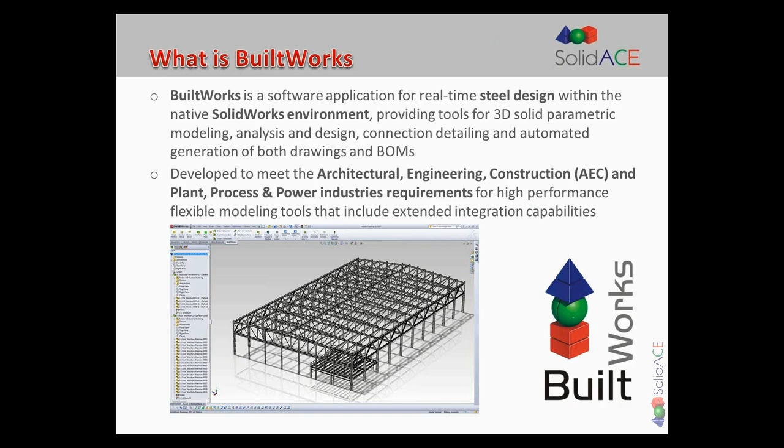BuiltWorks is an interface for structural design for SolidWorks, and it is the interoperability functionality for SolidWorks to bring SolidWorks into architectural plant building design workflow. We expand the native capabilities of SolidWorks, not replacing the power proven 3D modeling engine of SolidWorks. We're just moving it to next level by extending the list of existing tools.

Why we add additional structural modeling objects into SolidWorks? Here is a comparison of SolidWorks structural member, or as it's called, weldment, and a new object that we bring with BuiltWorks. It's BW beam object, or BuiltWorks member. You can see the main conceptual difference. The BuiltWorks member is a single feature, single new feature in SolidWorks feature tree, comparing to structural member, which is combined from several features.

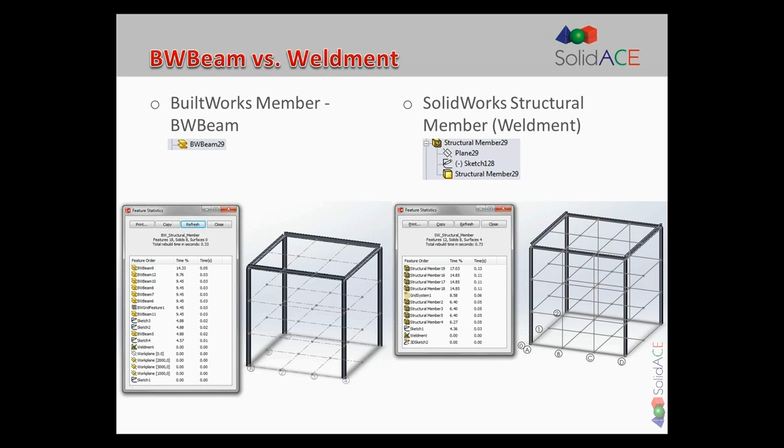I can say at least 4 features are needed to be created in the tree to create a SolidWorks structural member. And this, of course, impacts the performance, the capabilities of SolidWorks. Moreover, as you all know, with weldments you can only work in part mode, then manually assembling them into assembly, while with BuiltWorks you can start working in assembly mode, or you can work in parts or in combined way. So it's more flexibility and more power, more performance in SolidWorks.

Now the second aspect of BuiltWorks is the range of interoperability features. It is the support of the most popular data exchange formats in this specific industry area, CIS/2 and SDNF, Steel Detailing Neutral File, and CIS/2 stands for CIMSteel Integration Standards Release 2, which are the main structural steel data exchange standards. With support of those standards, we provide the SolidWorks link to plant design, enabling to exchange data with such plant design systems like AVEVA, SmartPlant 3D or PDS, AutoPlant, and other plant design systems.

We also do provide the bidirectional link, direct link to STAAD.Pro, the most popular structural analysis and design system. So we enable SolidWorks users to do code-checking-based structural analysis for the models in SolidWorks. But with CIS/2 format analysis model, which is supported in BuiltWorks, we can also link SolidWorks models to other structural analysis systems like SAP 2000 or RISA or Robot, and a range of others who support CIS/2.

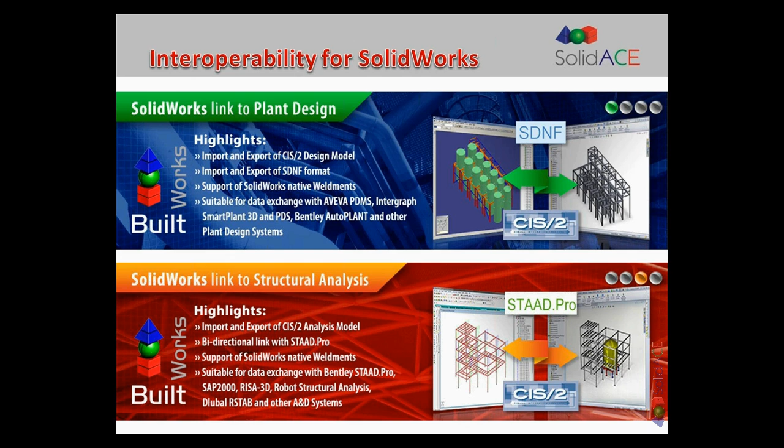Same formats also provide link to detailing and fabrication systems like Tekla or StruCAD or others. Well, Tekla and StruCAD today are in one team, but then there is SDS/2 high-end fabrication system, and also a wide range of other building and structural design systems like Autodesk Revit, Bentley Structural, ProSteel, Graitec Advance Steel, AutoCAD Structural Detailing, and so forth and so forth.

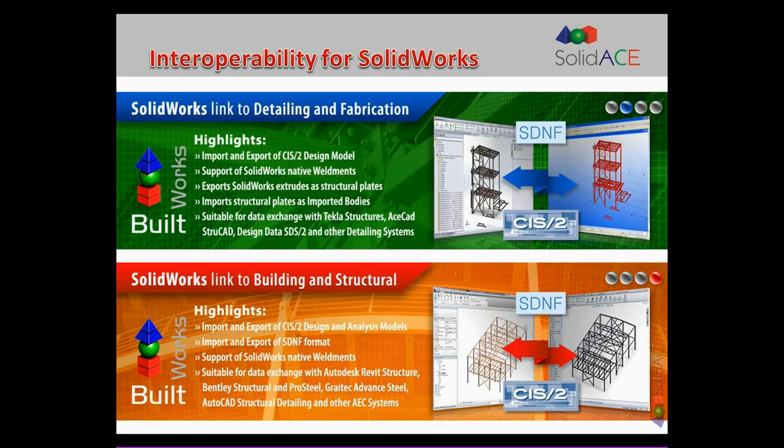So the main concept and philosophy of BuiltWorks is to enable SolidWorks users to prepare general arrangement models of building and plant structures using typical AEC structural design rules and features of steel materials, which we bring with a range of steel section profile databases that are provided with BuiltWorks.

Also to enable SolidWorks users to effectively exchange the intelligent structural steel design data with third-party AEC and plant design and detailing systems by putting SolidWorks inside the whole plant or building design workflow. And of course, enabling structural analysis and design of created structures using either SolidWorks Simulation or leading market analysis and design software applications.

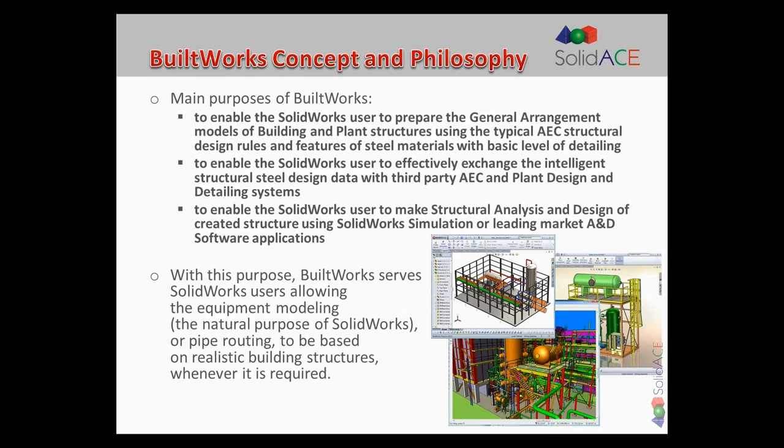So with this purpose, BuiltWorks serves you as SolidWorks users, allowing the equipment modeling, for instance, the natural purpose of SolidWorks or pipe routing or other SolidWorks functions, to be based on realistic building structures whenever it's required.

Just to emphasize the importance of those interoperability standards, here's a typical mix of solutions in engineering, procurement and construction companies. I don't say that each company has this variety of plant design systems, structural design systems and analysis systems, but if you look from company to company, there is a mix of various solutions, and typically there are several departments in such companies: the mechanical department, structural department, plant department, and so on.

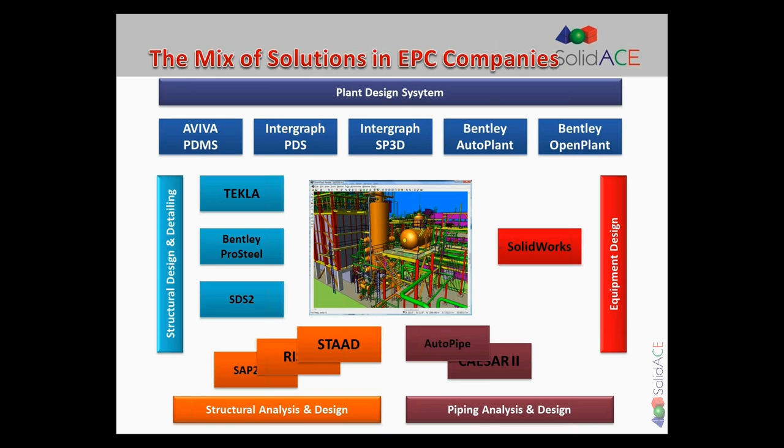So for equipment design like SolidWorks, of course, there are also some other vendors, but we don't talk about them today. What we wanted is to stress the interoperability requirements to enable all those applications to work together. So if we take a closer look at what data exchange standards those applications support, we always and everywhere need either SDNF, the older format for steel data exchange, or the current trend format CIS/2. For piping analysis, there are other formats.

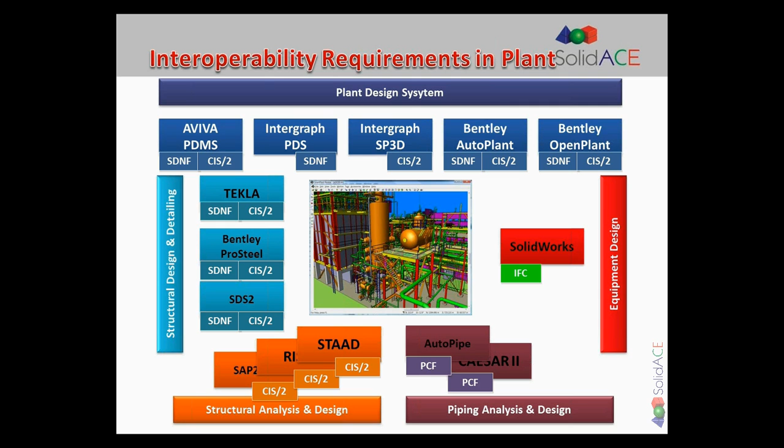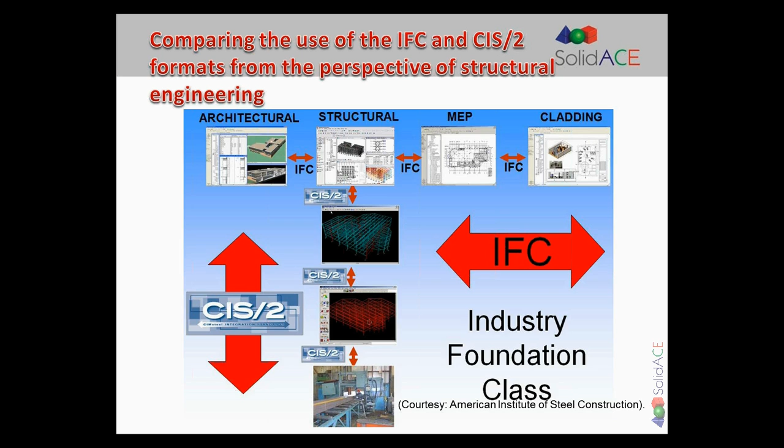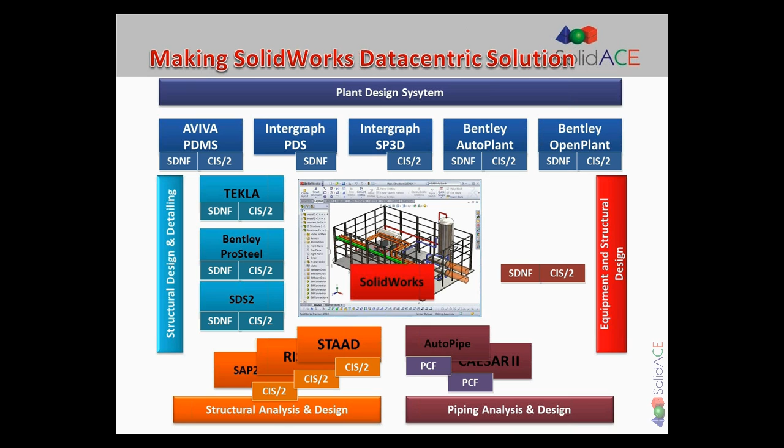So having IFC inside SolidWorks today, we with BuiltWorks bring an additional format which very much extends the interoperability capabilities of SolidWorks using IFC, so CIS/2. So we remove IFC from this workflow and extend SolidWorks by adding SDNF and CIS/2 formats, thus making SolidWorks a sort of data-centric solution. How can it be used in this way? We are going to illustrate today, just briefly mentioning the wide range of various applications which support CIS/2, and BuiltWorks, or we can say SolidWorks, is supporting CIS/2 today as well. So this is what we would like to illustrate.

One demo should explain how SolidWorks became a data-centric solution by integrating SolidWorks into the structural workflow. So we can import the general arrangement model from, let's say, plant design systems, which are not developed to have deep detailing and modeling capabilities. The plant design system needs just a very basic structure for planning the plant and all plant infrastructure.

Now, we can import this data into SolidWorks and perform the parametric modeling of a steel structure using BuiltWorks tools, as well as, as we will show later on, the native SolidWorks functionality. SolidWorks structural members can be used here as well. We can also link this model to a structural analysis and design system, and automatically update the model based on analysis results.

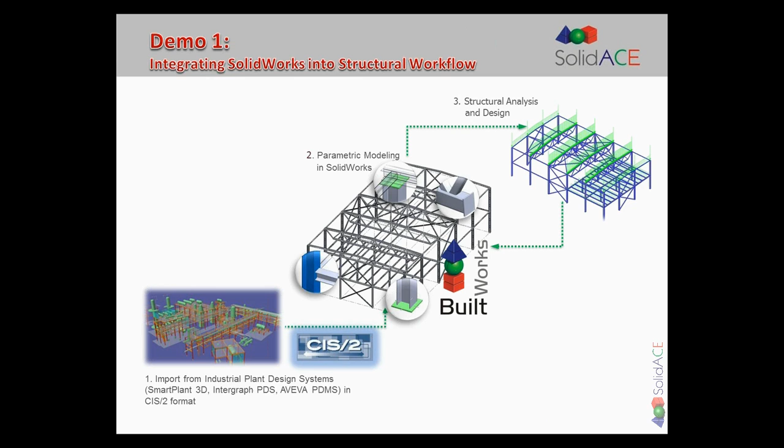We can then continue modeling the structure by detailing the connections and then issue the drawings and specifications, or we can transfer the model further to high-end structural design and manufacturing systems such as Tekla or Advance Steel or ProSteel, as mentioned. And then again, we can use either the same CIS/2 or SDNF format, depending on which serves best. So just to give the whole overview, Liudas will try to show this workflow live.

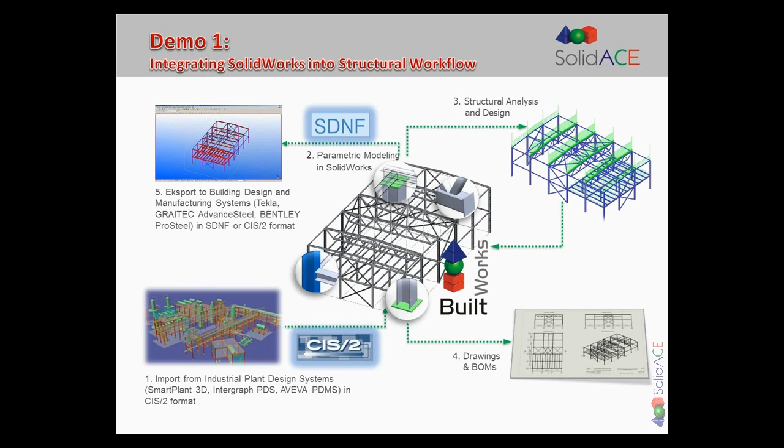For the end, depending on how much time we have, we also would like to demonstrate how BuiltWorks allows you to use pure SolidWorks features, pure weldments, extrudes and other features, which are now also possible to export to CIS/2 and then use in other applications for interoperability and further detailing purposes.

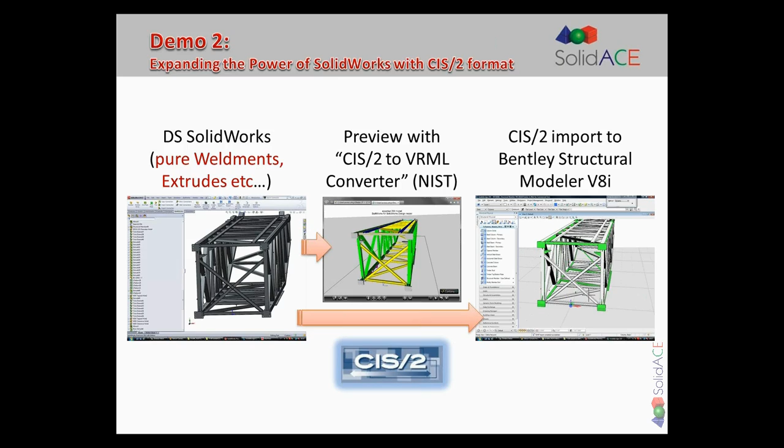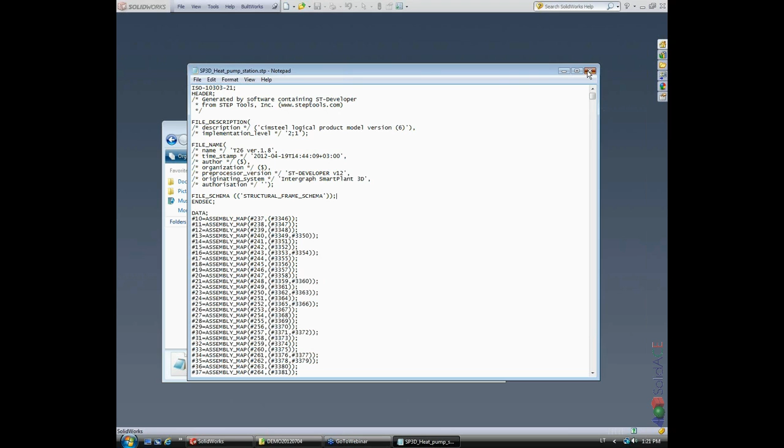First of all, here I have an STP file exported from Intergraph SmartPlant 3D software. This is a CIS/2 format file, and we're going to import it into SolidWorks. To start, I need to decide whether to import my structure into a part context or an assembly context. It depends on the complexity of the structure. This structure is quite complex, so I'm going to create an assembly.

Let's create a new folder and save the structure. First, when you launch SolidWorks, locate the BuiltWorks toolbar. Here are allocated all the features and tools of BuiltWorks, and now I'm going to use the BuiltWorks import, where there are some import options. I can import the analysis model from STAAD, some kind of geometry from SDNF, and also, as you'll see later in this demo, we can update the results of design from STAAD Pro. Now I'm going to import the CIS/2 file.

Here opens the dialog, and first I need to locate that CIS/2 file. Next I can decide whether to import offsets of the structure or not. There's also a possibility to choose whether to import only the sketch. The structure can also be imported as weldments, as Arūnas mentioned, but since the detailing possibilities of SolidWorks are quite limited, we're going to import as members. This option stands for BuiltWorks members. Also, the model has no plates, so this option is not necessary.

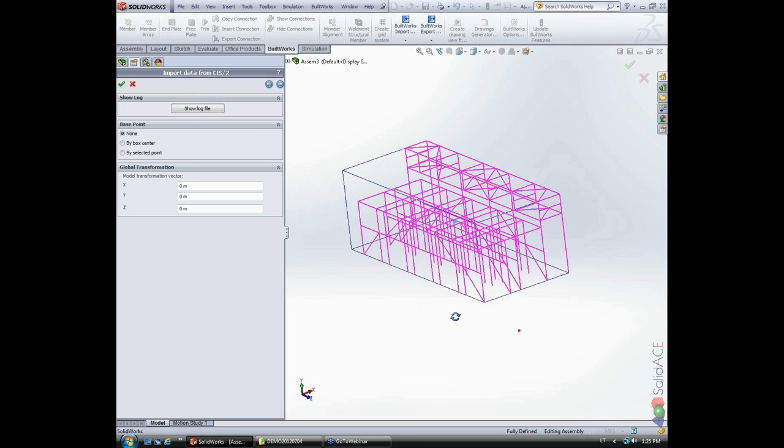And here is the preview of the sketch of the structure. In the dialog, you can center or position the sketch anywhere in the graphic area. Next, the preview of the profiles is being generated. While it's updating, I just wanted to comment on one thing he said.

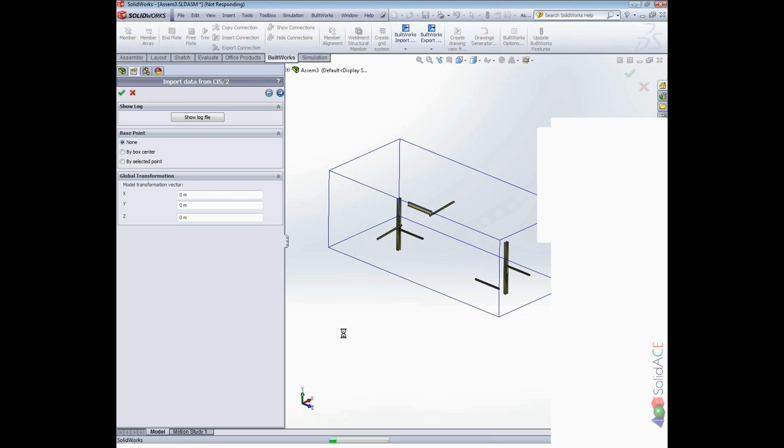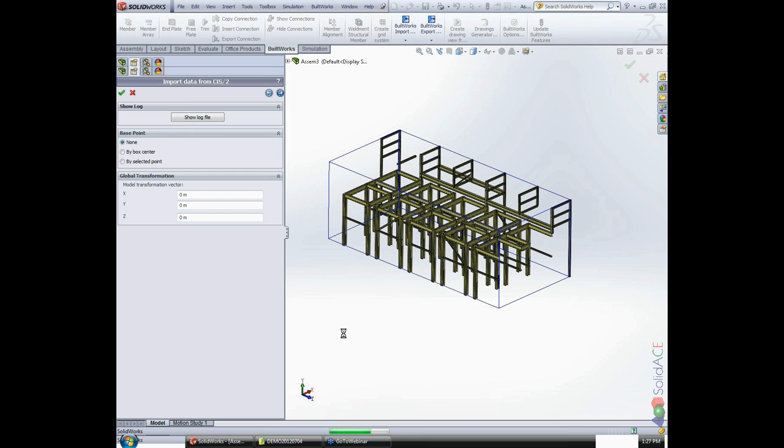He said SolidWorks detailing capabilities are limited. He means that if we use weldments and weldment connection treatment features, there are just two options: to trim by angle or by straight line from member to member. That's it. Maybe Ludas will show later on briefly the wide range of connection detailing and trimming options based on structural engineering rules, a little bit differently from mechanical engineering for machinery support design tools. So that was the meaning, but it doesn't mean SolidWorks isn't powerful enough to do whatever you want.

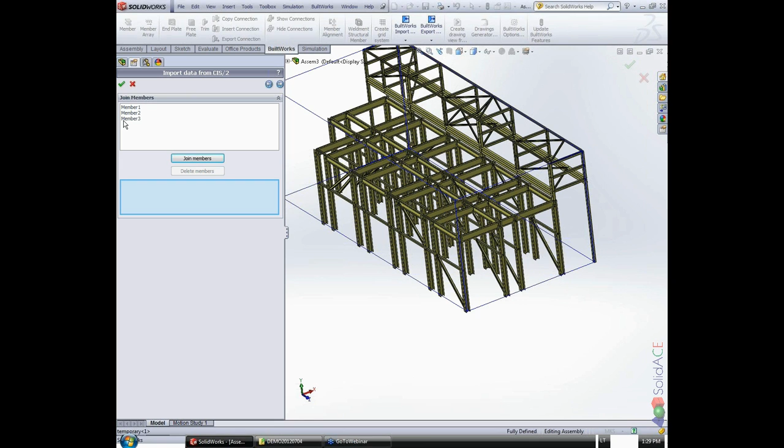The preview is generated, and automatically the next dialog opens where the user can exclude some unnecessary members from the structure. Next opens the dialog where the user can join split members, because this CIS/2 came from SmartPlant 3D but was exported to some kind of analysis and design software. Simply by selecting the split segments, we're joining them. Okay, we have a few columns joined.

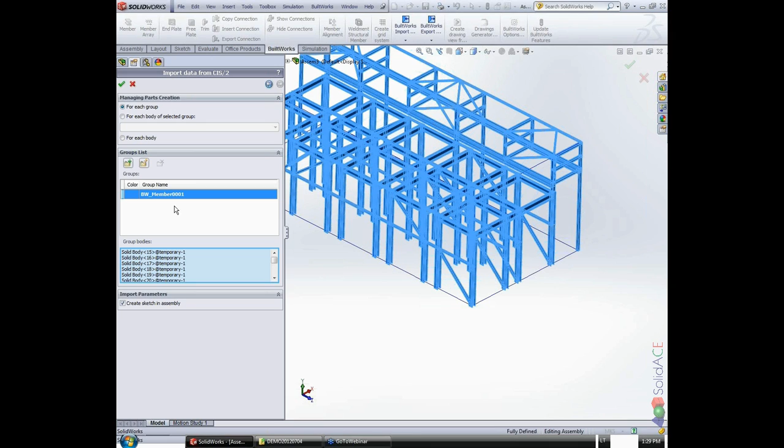Next, the system collects all the members, because the next dialog that opens will allow us to group all the members into several parts, simply by adding new groups and selecting the members from the graphic area. We are creating the groups.

Now we are going to create one part for these 4 columns and a lot of parts for the rest of the members here.

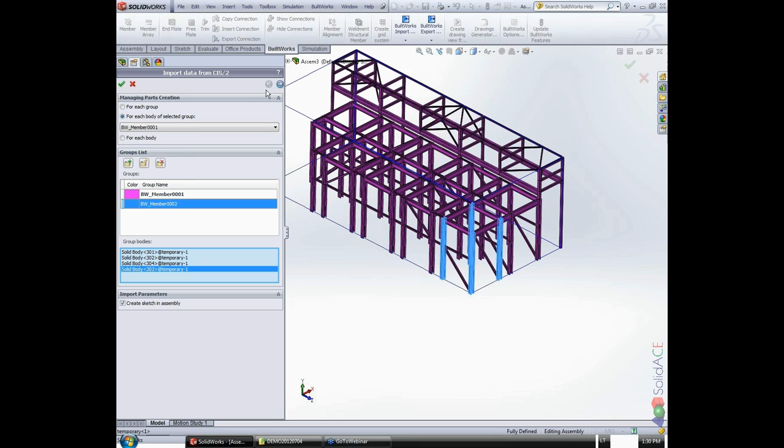Okay, next, no more steps to go. We can click OK, and the structure is going to be imported. In the final stage, the system allows us to review the imported sections of the profiles. If everything is okay, we simply click OK.

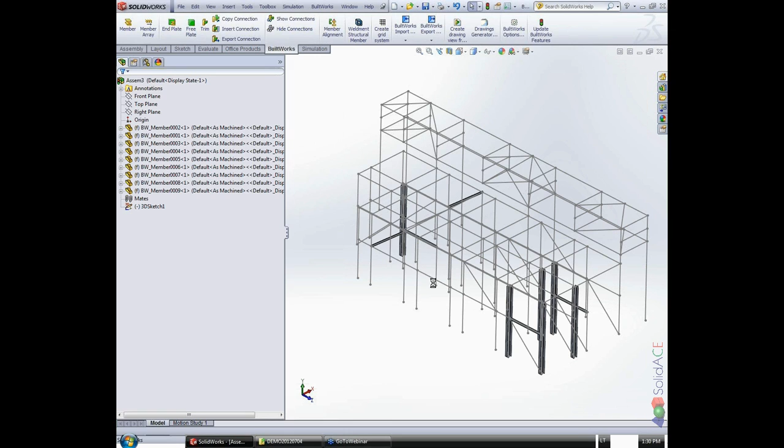As you can see, the sketch is being created first, and next the members are being placed along the sketch lines.

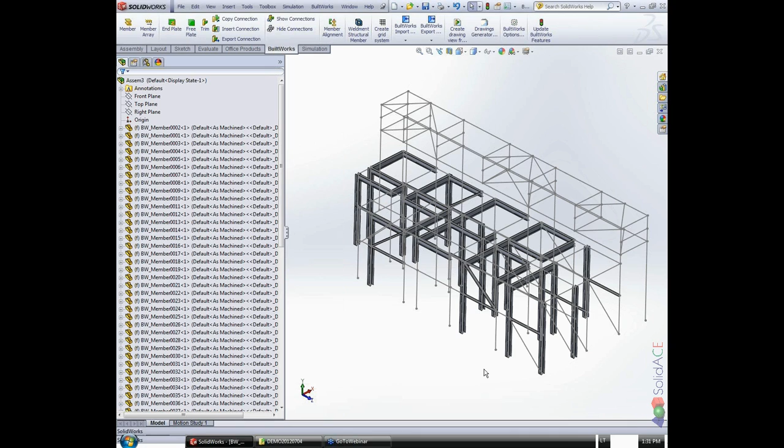Ludas simply did not make many groups, but grouping has some meaning actually. Some same type of members can be grouped into separate parts, multi-body parts, which then can be processed in groups. In this case, for the sake of saving time, Ludas showed that he grouped only 4 members in one group, which will be created in one part file. The rest will be imported as individual parts, but of course in normal working mode you would continue grouping necessary members into logical groups until you are satisfied with a set of groups which will be created as separate parts.

And of course you see that everything is being created in assembly. Even if during import Ludas would choose to create not BuiltWorks members but SolidWorks structural members, or so-called weldments, that would be immediately all created in assembly as separate parts, or in multi-body parts as you group them during the import.

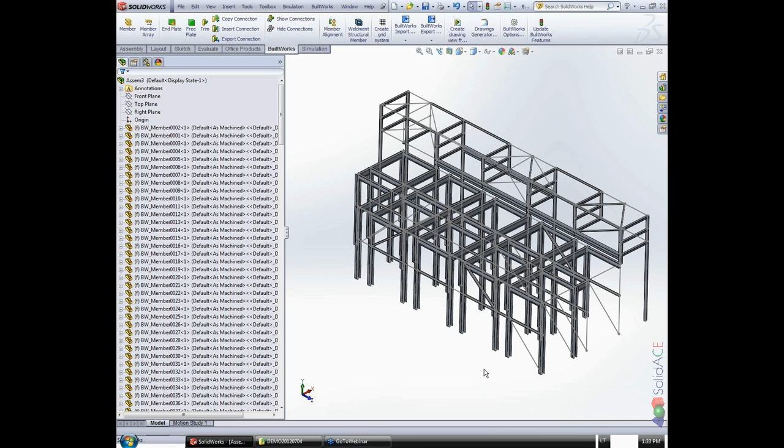So after the model will be automatically created by the import procedure, Ludas will show just a couple of things about what those structural members or BuiltWorks members are actually, what they consist of, and what modeling tools or placement tools you can use to enhance your structure, modify your structure, or create your structure from scratch.

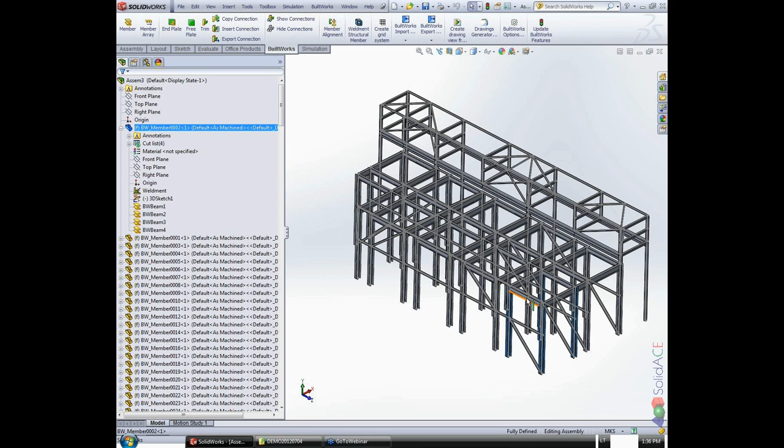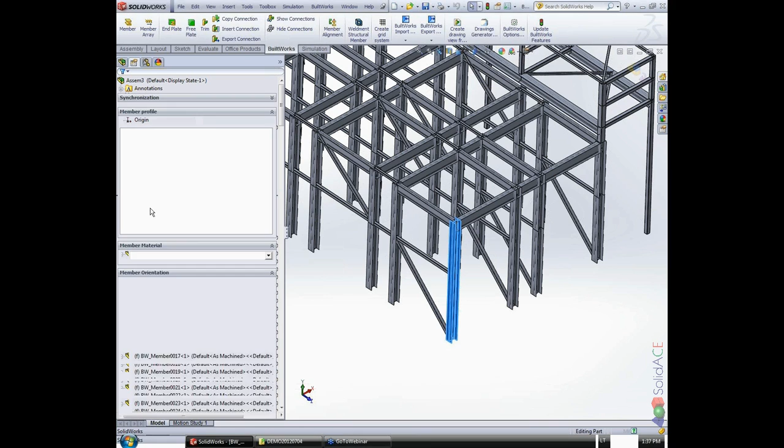I will probably continue. So here is the structure imported, and as you can see, those 4 columns which were grouped, they are imported in a single part. Now if I go to the feature of the BuiltWorks beam here, it opens the dialog where I can change the orientation of the member by selecting those so-called cardinal points, or simply by...

Please, Ludas, show the databases of profiles that are included. Okay, I will show that. So the database which BuiltWorks provides consists of various international databases based on particular international codes.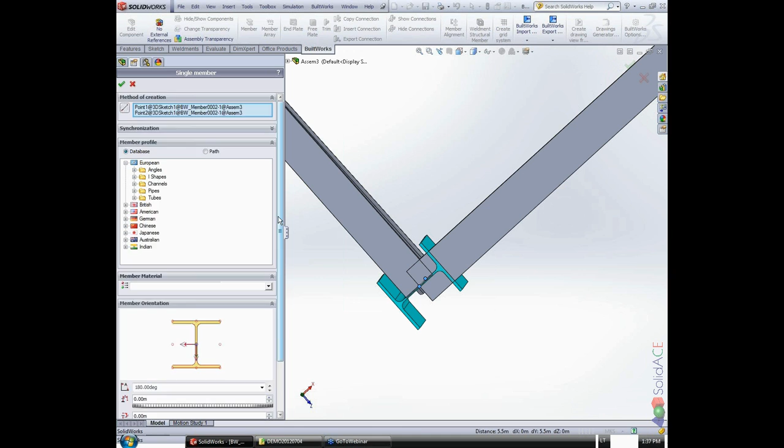More about orientation, here also the offsets can be added, symmetrical or asymmetrical as well. Okay.

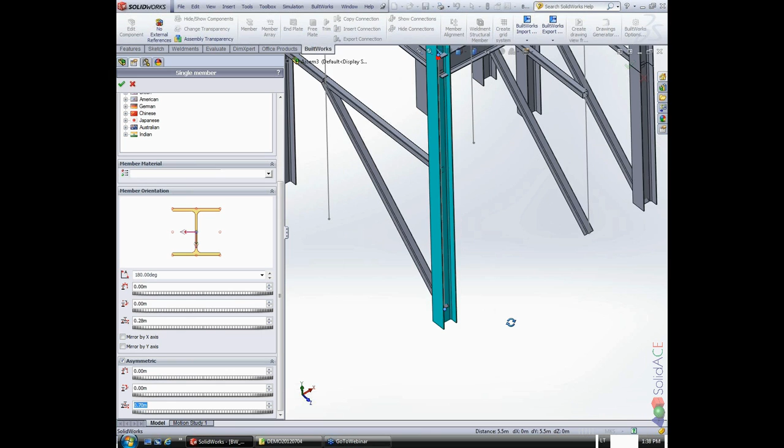Maybe next what I needed to show is that it is possible to place the BuiltWorks member without having a sketch line. This means that you can place the member from one point to another, and also use various possibilities of orientation. For the profile, the user can use not only the BuiltWorks database, but also a custom library, which might consist of SolidWorks weldment profiles that are downloadable. Okay, let's create this member here.

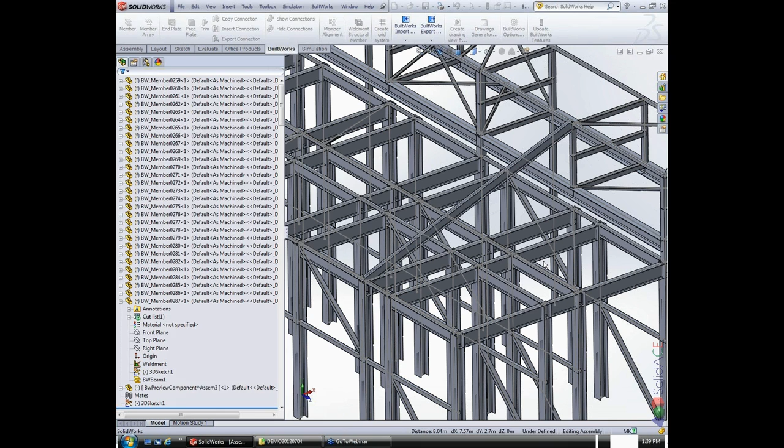And before further detailing, we are going to export this structure to analysis and design software. For analysis and design software, BuiltWorks offers a bidirectional link with the STAAD.Pro application. Here we can export objects such as elements, we can export only the sketch lines. Also, we are going to export BuiltWorks members, so the option for that is checked. We are going to export all geometries, and there are possibilities to choose the unit system and the design code and other various options for design and optimization. After I click OK, the structure is being exported and the STAAD.Pro application should launch automatically.

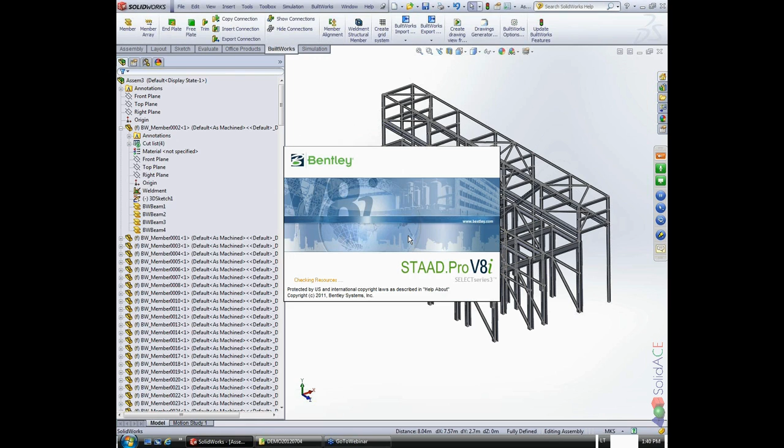By the way, while it's loading, there was a question from the audience: is it possible to import plates into STAAD, or only beam elements? Only beams are being transferred to STAAD and back in this case.

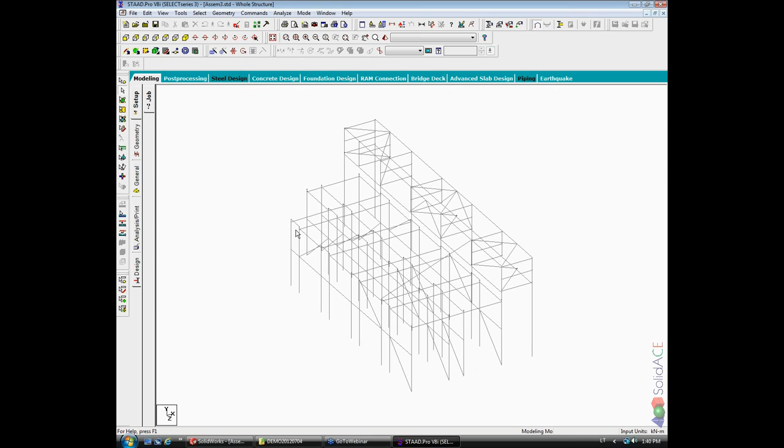Okay, so the structure is imported into STAAD, and from here you can continue with analyzing, adding supports, applying loads. But I'm not going to do that. I will just change the profile of a few columns.

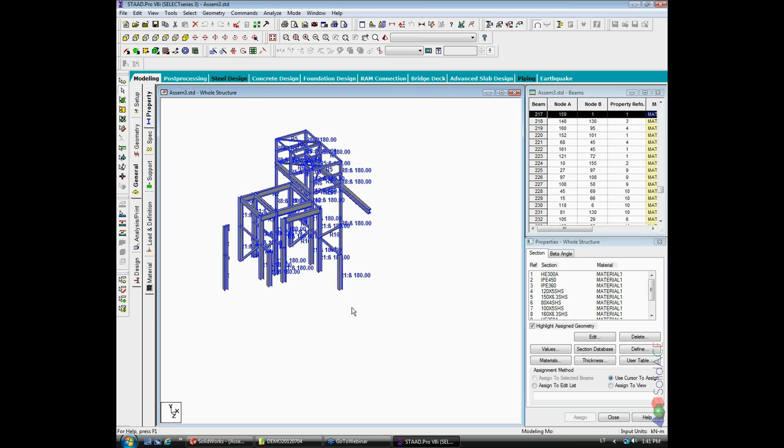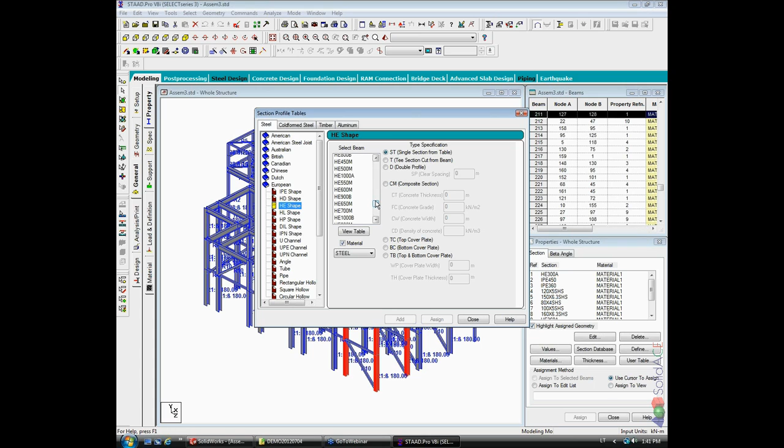Let's select these 4 columns. You noted that while we were importing the structure, which was the analysis model, the CIS/2 file analysis model, it was split to finite elements. We joined those elements to single columns as it should be, and now when BuiltWorks exported the model to STAAD.Pro for analysis, it again split it automatically into finite elements as needed for structural analysis purposes. Okay, I changed the profile of these 4 columns to the bigger one.

Now, as usual, I need to save the results file separately from the original STAAD.Pro file. I can close this tab, and now I'm going to import not the whole model from STAAD, but just the results.

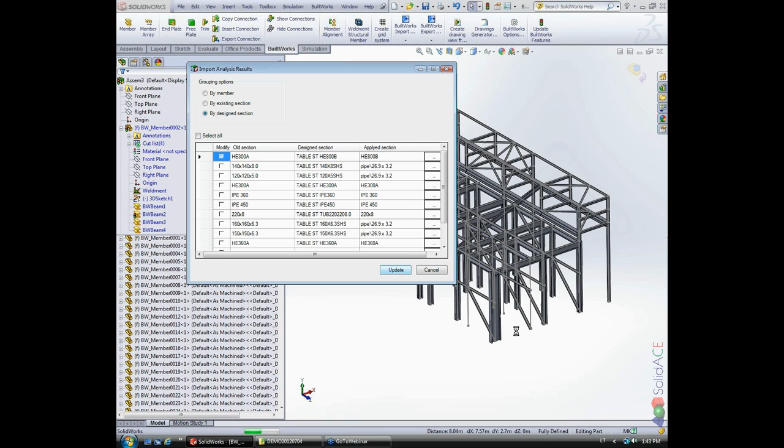That means we are going to update the structure here with the results of the analysis. The results file is located here, and here opens the dialog for importing analysis results. We don't need to update all of the sections, just the one we have changed. The preview was generated also, and as you can see, the columns are being updated.

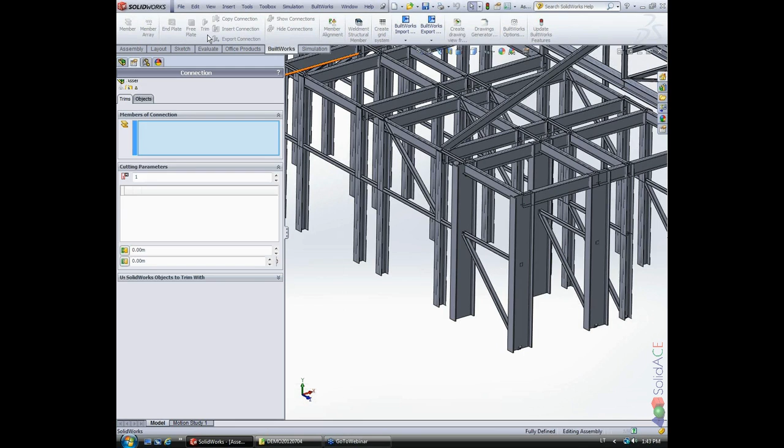Okay, next step would be to detail the structure. I'm going to show you a bit of the trimming function. Here is the possibility to trim several beams at once. For example, I select them by priority order. Later on, the priority order can be changed.

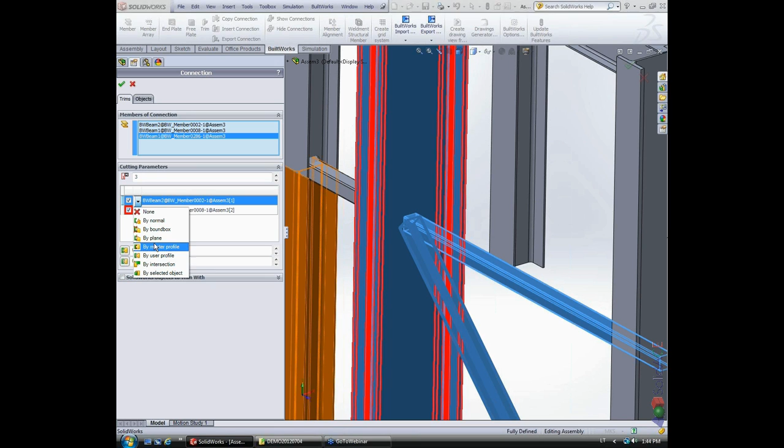Now I'm going to trim this one beam to the column by its normal, and this bracing here I'm going to trim to the column by the master profile, by the profile of the column, and by the plane of this upper bracing here.

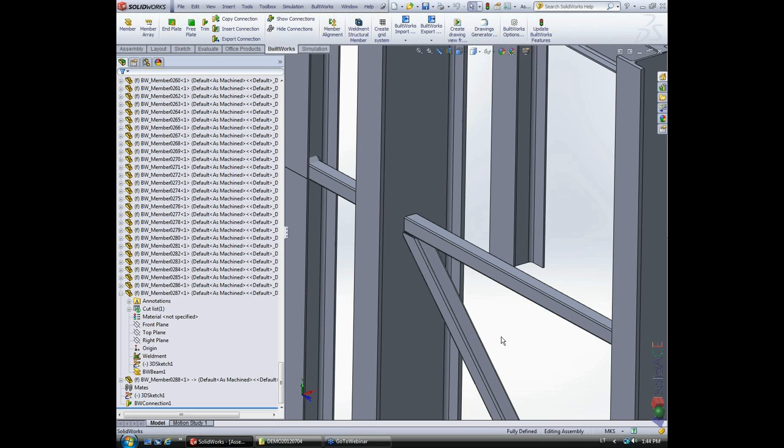This creates a parametric connection. That means if later, after analysis or after some other changes, these profiles would be changed, the cuttings will be applied accordingly.

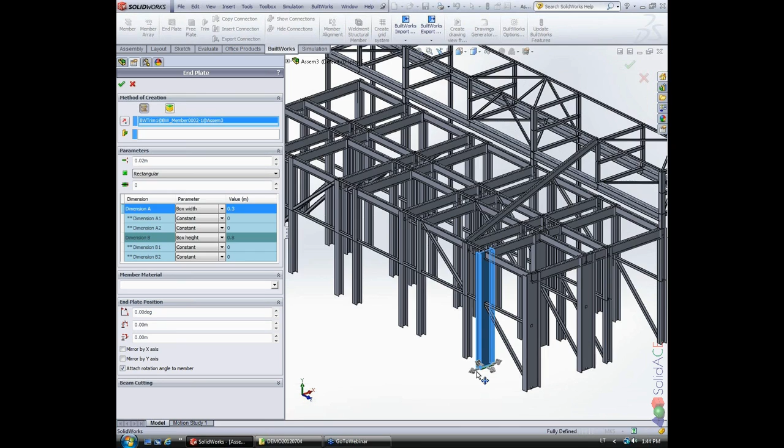Okay, so next we can add some end plates, just simply showing this. There are various possibilities to edit this end plate, through entering some values for the extensions, or just by dragging these arrows here.

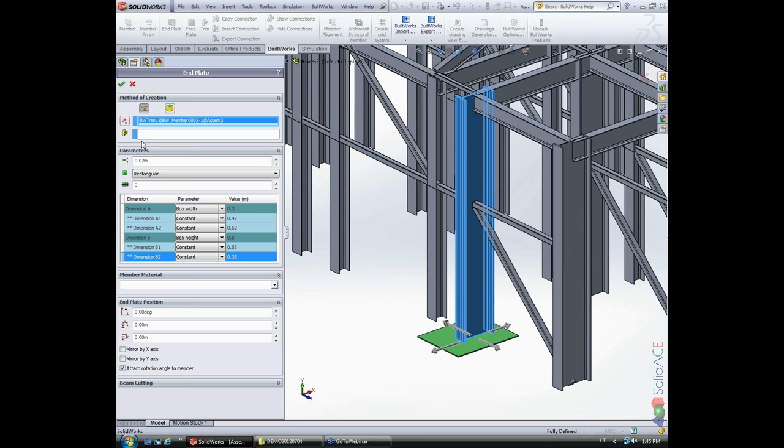The end plate also creates the parametric connection, and the end plate will adjust to the size of the column if this column is going to be changed.

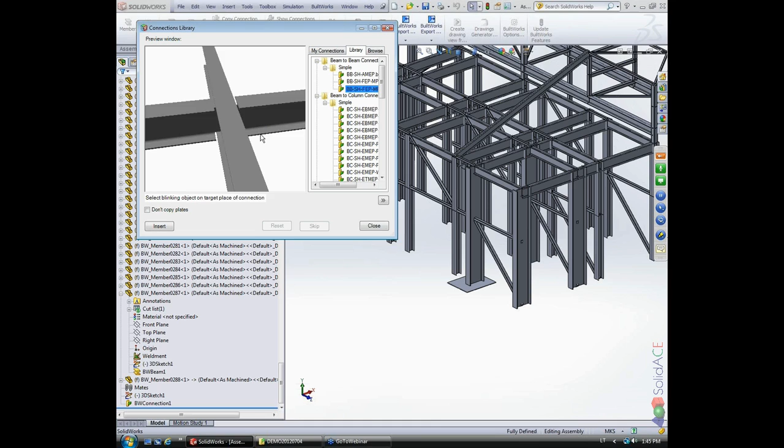Also, BuiltWorks provides some standard library of connections, just simple basic connections which might be useful for the user. All the connections can be created using BuiltWorks features, and later they can be stored into the library or copied to another place in the structure.

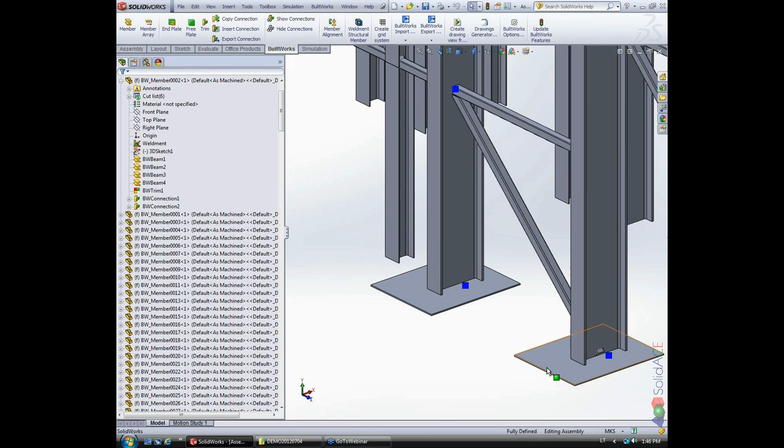Okay, next I'm going to show you the export to another format, SDNF format, and we are going to import the structure into some third-party CAD application. For the export to SDNF, we can choose to export to SDNF version 2 or SDNF version 3, depending on the third-party application.

And there is also the possibility to export weldments, SolidWorks gussets, SolidWorks end caps, or BuiltWorks free plates, or BuiltWorks end plates, also SolidWorks extrudes and other bodies. We're going to export all geometries.

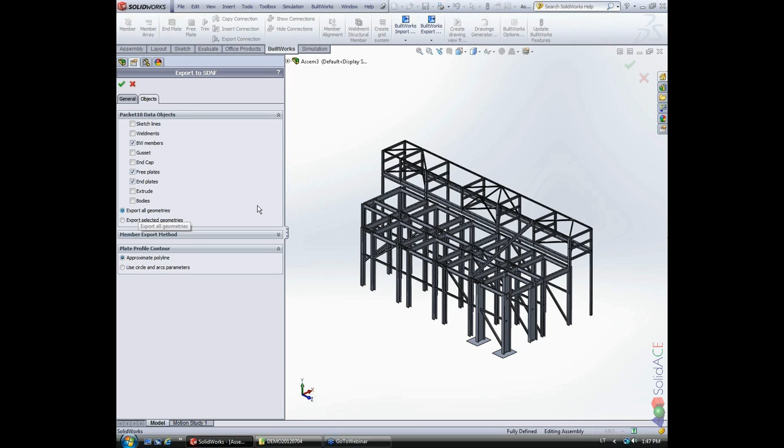The system allows me to open the exported SDNF file for review. But I'm going to open the structural modeler of Bentley and import that exported SDNF file.

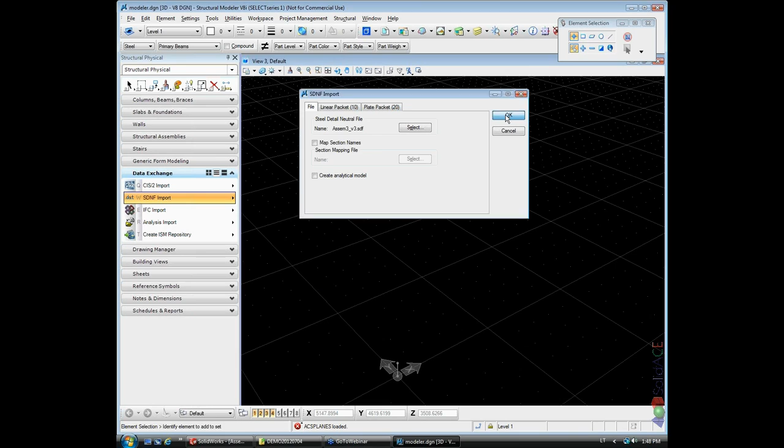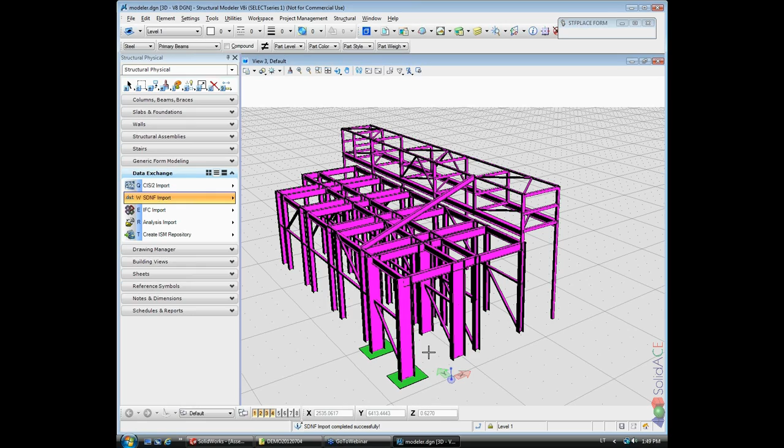So here for SDNF import, I need to select the exported SDNF, and the structure is being imported. Some of the profiles are not quite correctly mapped, so it needs some addition, but after all, the structure is being imported correctly with all end plates.

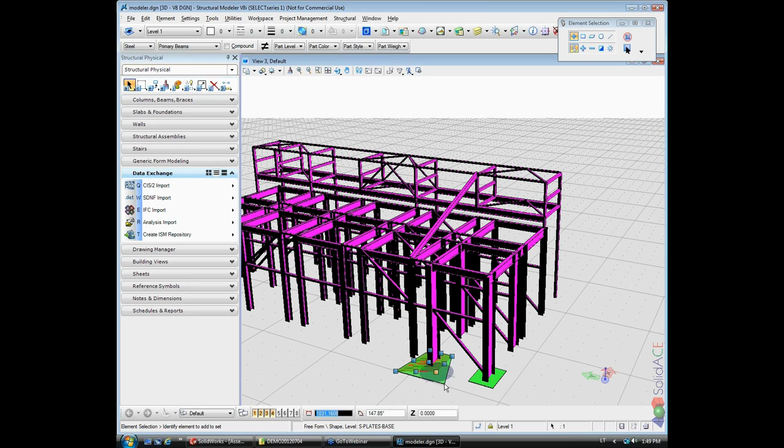Also, this is not only the geometry, but also some parameters we exported, such as profile names, and the end plates are also editable. So it's a fully intelligent and editable model on which you can go further with detailing and bring the model to fabrication later.

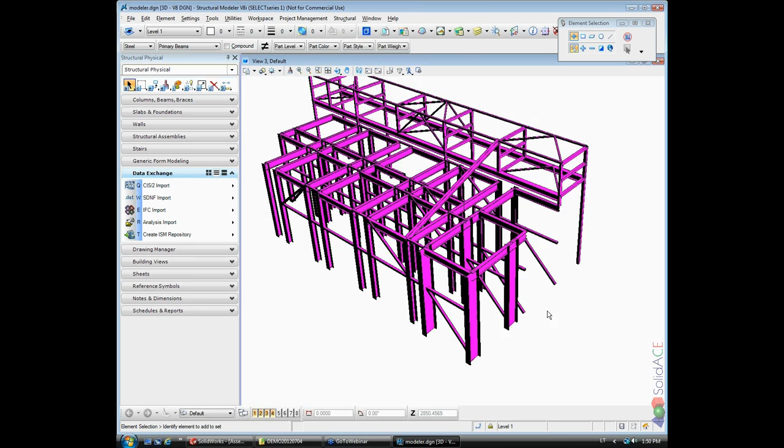Okay, this model is finished. Now I'm going to show you another model which was created using only SolidWorks features, such as weldments and extrudes, and we are going to export that model also to another format called CIS2. Okay, now I can close this.

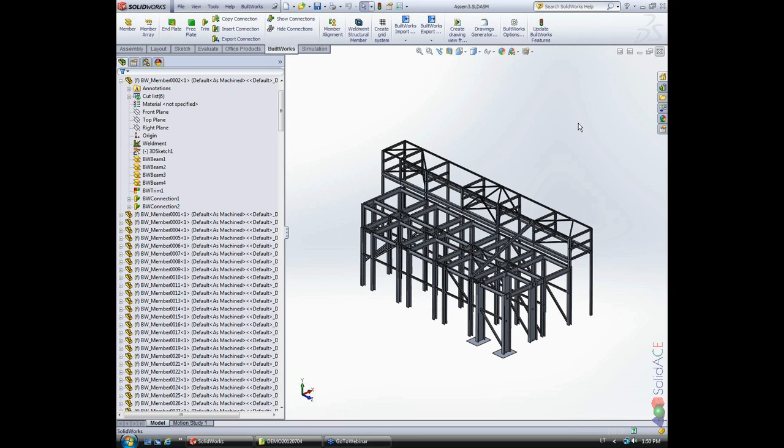Let me locate that model. Here it is. Okay, and here, as you can see, all the features are from SolidWorks: extrudes, patterns, structural members, weldments, trims, extends.

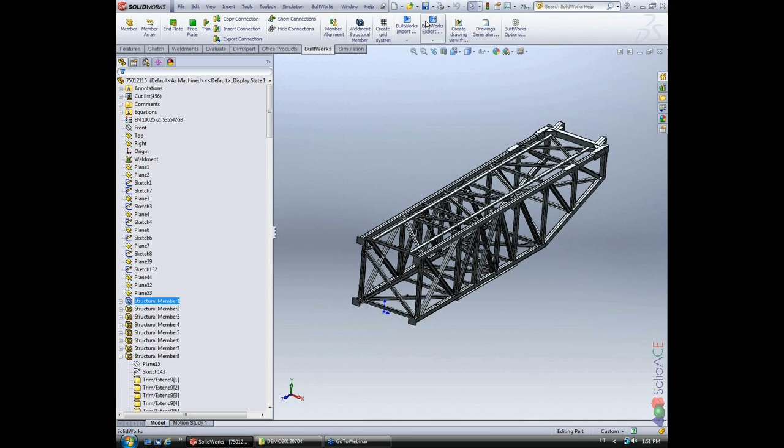Now for the export to CIS/2, I simply open the export to CIS/2 feature, and here I can export to CIS/2 analysis model or to CIS/2 design model. The analysis model will consist only of structural members such as beams and other bracings, without any plates or any kind of extrudes.

Design model will consist of the full model, including all the end plates, all the members, and other bodies. Here we have the structure of weldments, now end plates of BuiltWorks, now free plates of BuiltWorks, maybe some gussets, some end caps, extrudes, and other bodies.

We are going to export all geometry, and here I need to choose the default CIS/2 mapping file. After I click OK, the structure is being exported. The system offers me to open that exported CIS/2 for review.

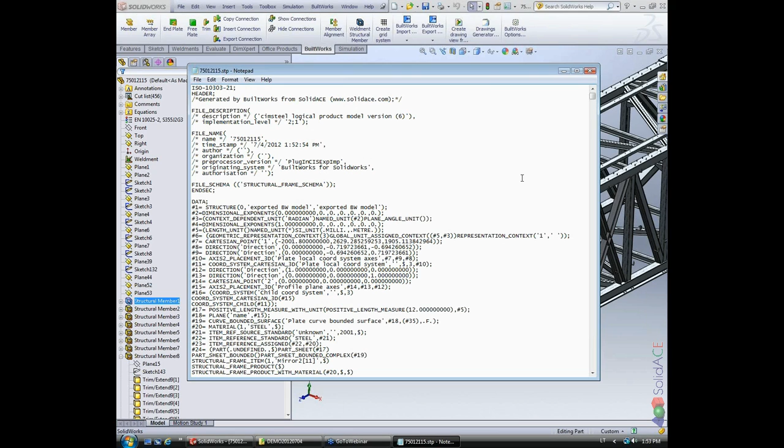Now we can continue with importing that CIS/2 to some third-party application which supports it, or what I'm going to show you is that we can import the IFC gained from translating CIS/2 to parametric IFC format, and later upload that IFC file to the Tekla BIMsight.

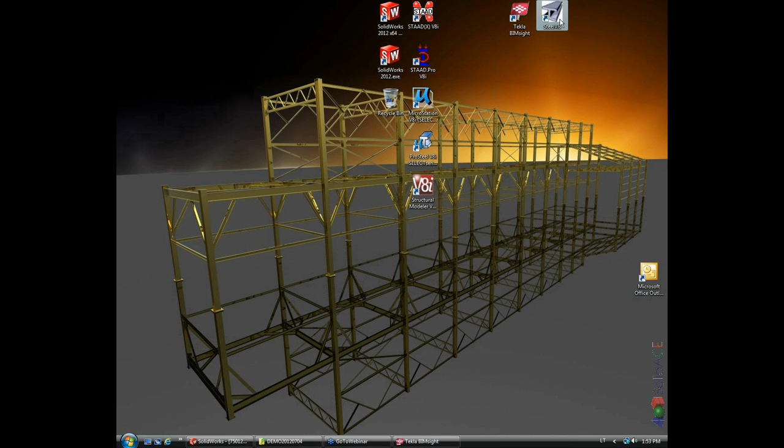For the translation from CIS/2 to IFC, we are using the application called STEP Wiz. Here I need to locate my exported CIS/2 STEP file. On the browser I can choose the viewer for the export, because this software also translates CIS/2 not only to IFC but also to VRML, which is the open format for review purposes.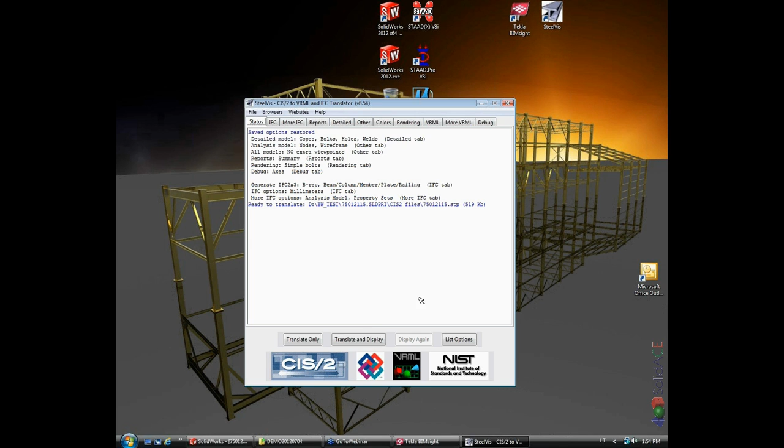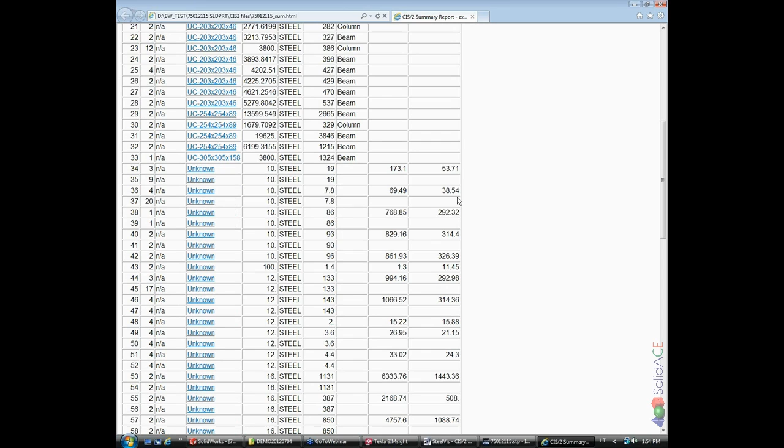This is a free application from the National Institute of Standards and Technology, and it's used for reviewing IFC and CIS/2 files, the content of them, the specification, as well as the physical model, how it looks like, and what members are inside that model before transferring it to another application.

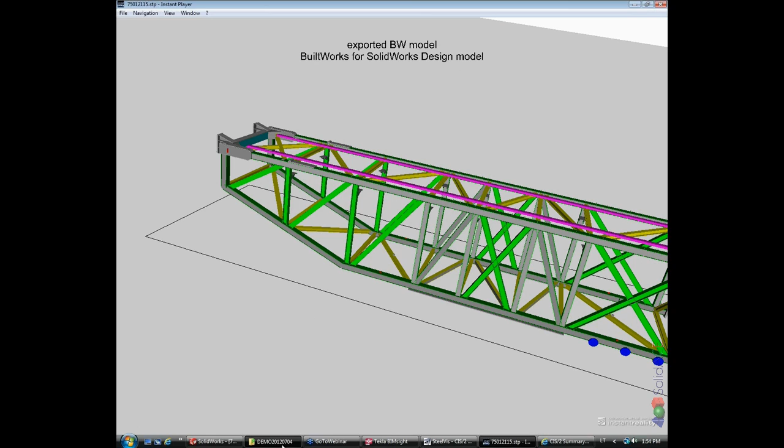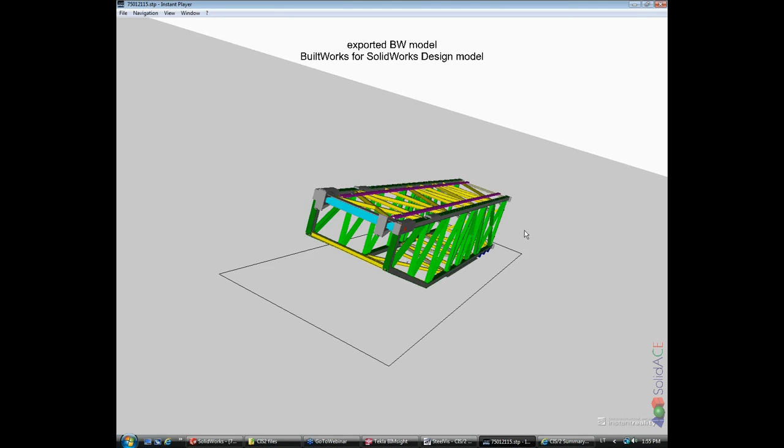It's used for checking the CIS/2 files, but in this case we will use this to create an IFC file, which is possible to export directly from SolidWorks. But Ludas will show the difference between how IFC exported as just dumb geometry, and if IFC is created from intelligent CIS/2 format.

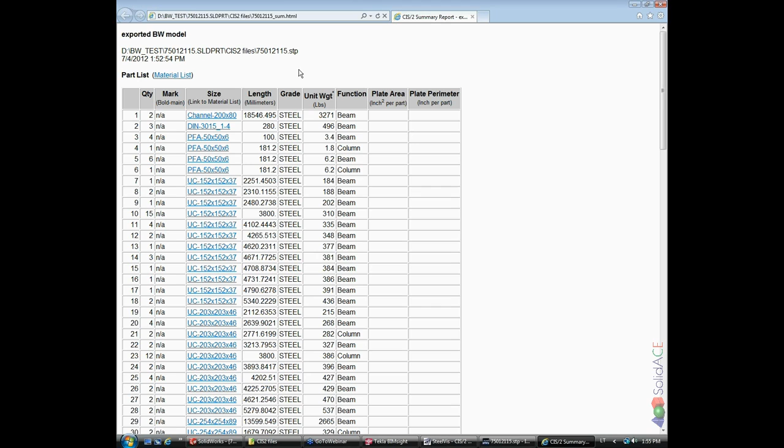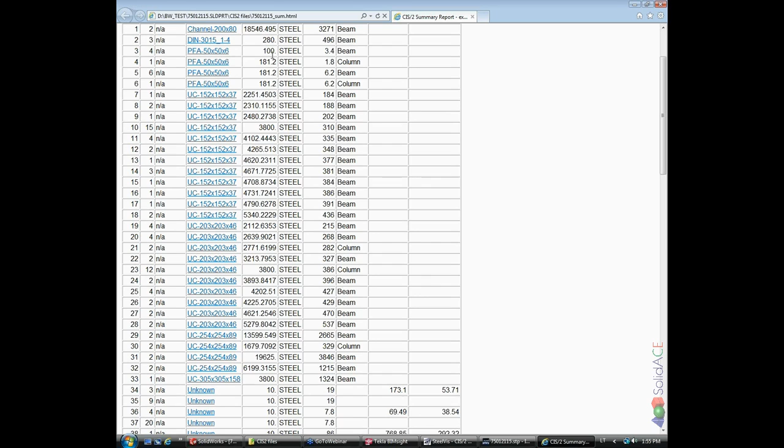Also, the translation done from that CIS/2 file created a report of all the sections and the quantities and other useful information, such as the total weight of the structure as well.

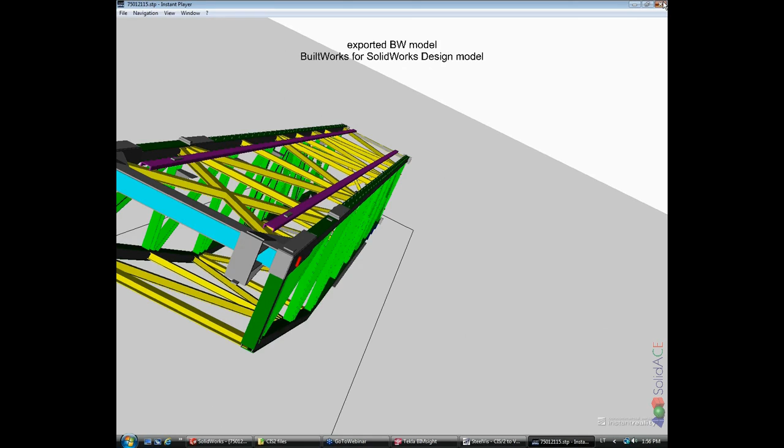And here, as you saw, this viewer displays the structure, the VRML format file of that structure. Now here is the generated IFC from that CIS/2 file.

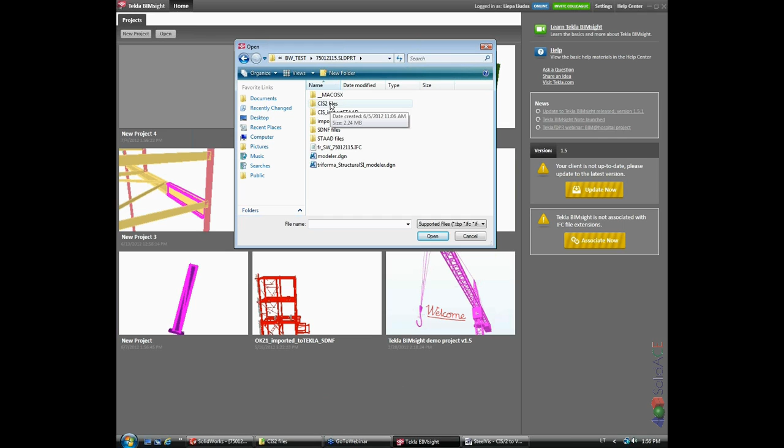I'm going to create a new project inside Tekla BIMsight. Sorry, not a new project, but I will open the translated IFC. Here it is. This IFC also can be imported into Tekla as a reference file.

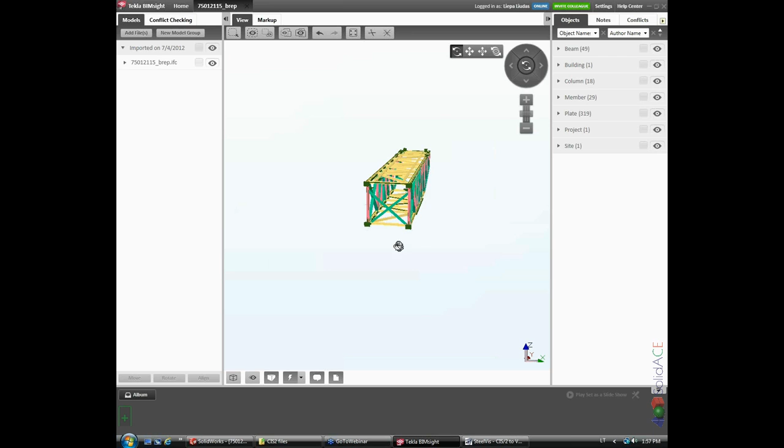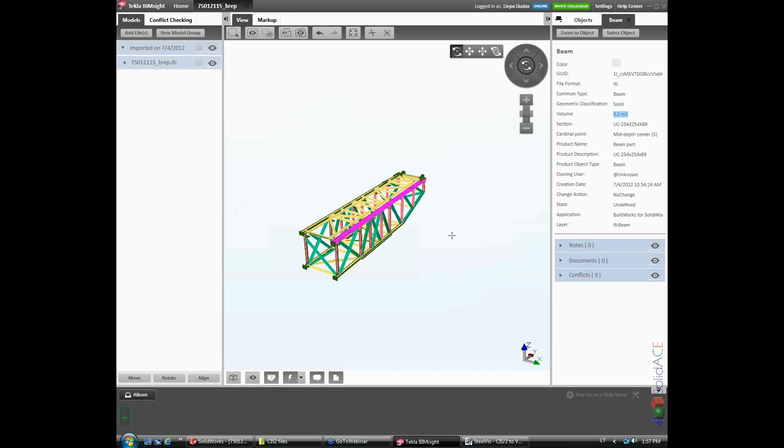Later on it can be converted to Tekla members easily with all the parametric information. Talking about parametric information, if I click on the beam, here you can see that the profile name was exported, along with other useful information. The same with the plates - the size of the plate is here.

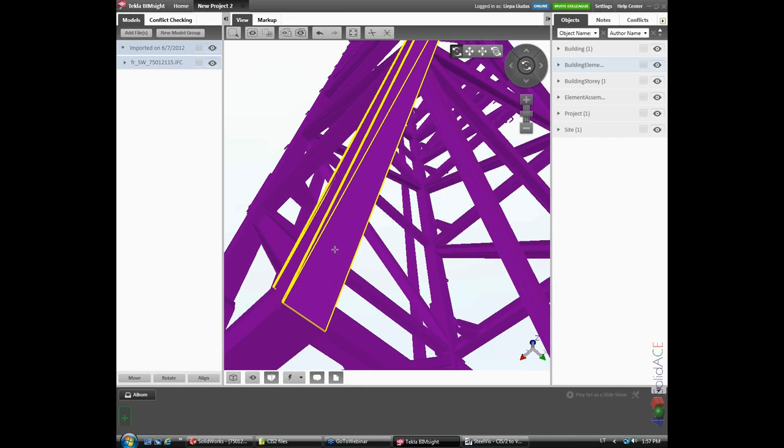If we compare this to the IFC gained directly from SolidWorks, here it is the same model, not as colorful as the one before, and without any useful information, just the name of the features from SolidWorks. So, more or less, it was just dumb geometry.

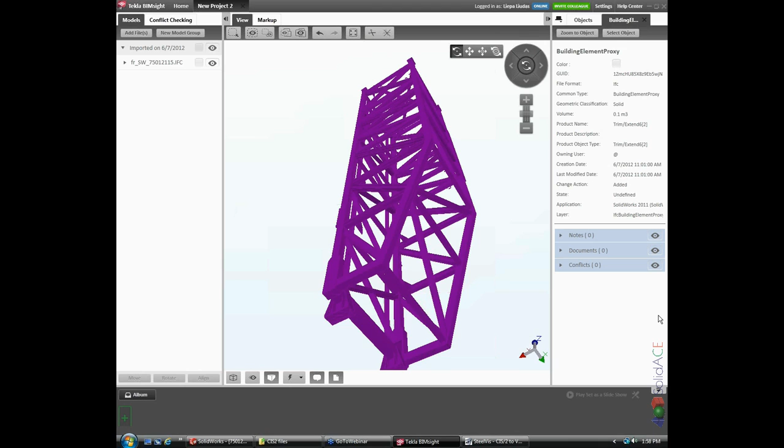Well, I'm finished with everything I wanted to show. Great, so we are exactly fitting into the time allocated for this webinar. Yes, and we showed two different workflows.

One full integrated workflow, making SolidWorks a data-centric solution with modeling capabilities inside SolidWorks and exchanging data with STAAD.Pro. And there was an additional question in the list asking if we can export a SolidWorks model to STAAD.Pro, and the answer is yes.

Simply in our demo today, we tried to show several formats at once: one for import, another for export, a third for linking to analysis and design. But the general idea is that all these interoperability features of BuiltWorks support equally SolidWorks weldments or SolidWorks structural members, as well as a new feature, BuiltWorks member, which tends to be more intelligent and more flexible for structural steel modeling inside SolidWorks.

So you can use your existing SolidWorks files for linking them directly to STAAD.Pro for analysis and updating the analysis results back to the model. Just for STAAD.Pro, we transferred only beams, only structural members. No plates are transferred for analysis.